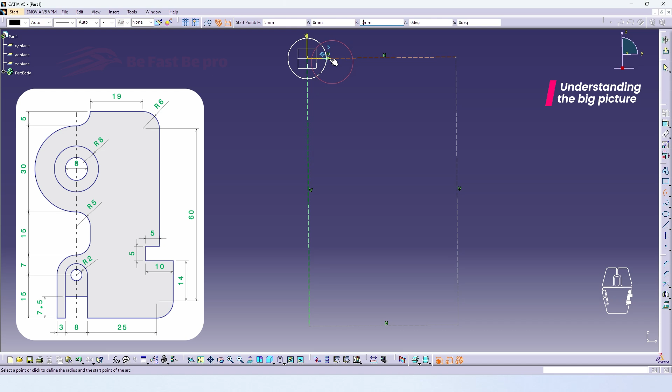Before you start, take a moment to look at the whole shape. Notice the main contours and overall geometry. Understanding the big picture first helps you avoid mistakes later.

Decide where your origin should be and which axes make sense. Usually, the center or a key corner works best. This will guide all your lines and keep the sketch organized.

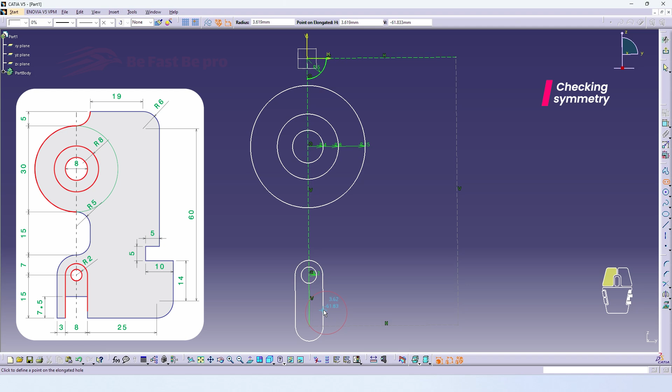Check if the shape has symmetry. If it does, you can plan to draw only one side and mirror the rest. This saves time and ensures a balanced sketch.

Think about the order you'll draw the sketch. Start with the main outline first, then add secondary shapes and leave small details for last. This keeps everything stable as you go.

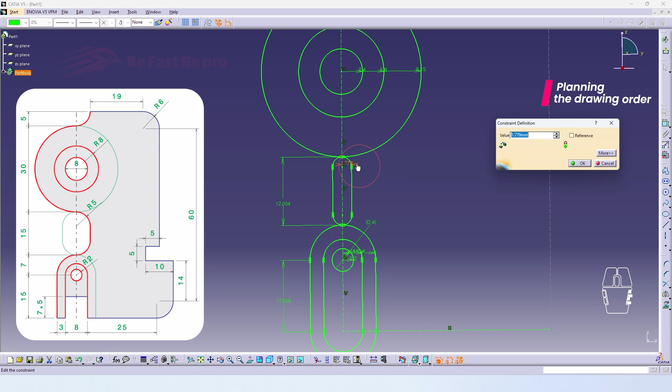Spot the key dimensions that define the sketch. Knowing these in advance lets you enter the correct sizes immediately and avoid conflicts later.

Look for tricky areas in your sketch, like tangent curves or tight intersections. Plan ahead how to simplify them so you don't get stuck halfway.

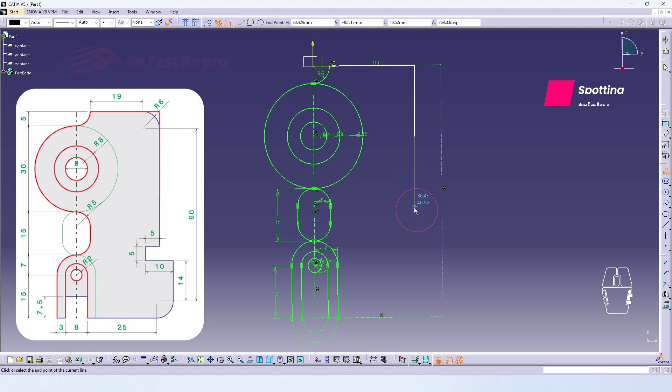So, just a few seconds of planning before you sketch can save you a lot of fixing later. Start smart, and the whole design process becomes faster and easier.

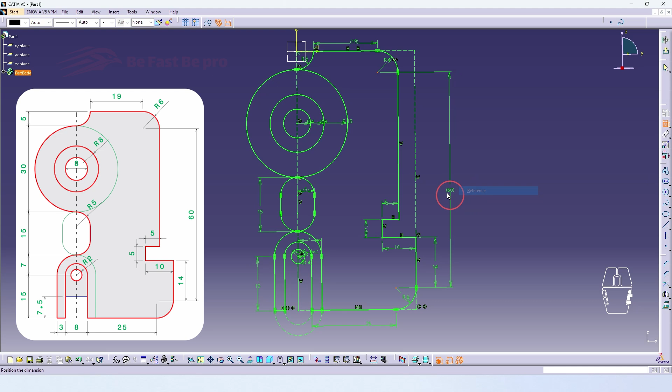And here's a quick tip. When you trim extra elements, sometimes the sketch can break because other geometry is linked to them. Instead of trimming, convert those lines to construction. This keeps the references you need without ruining the main profile.